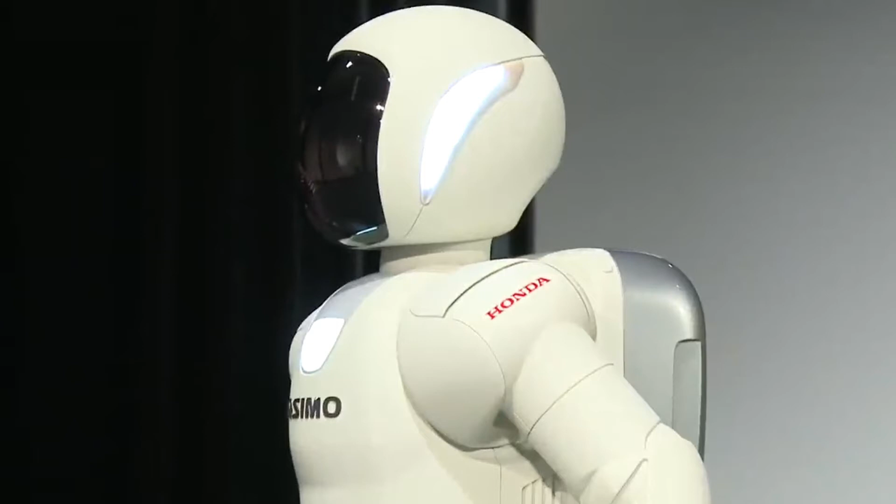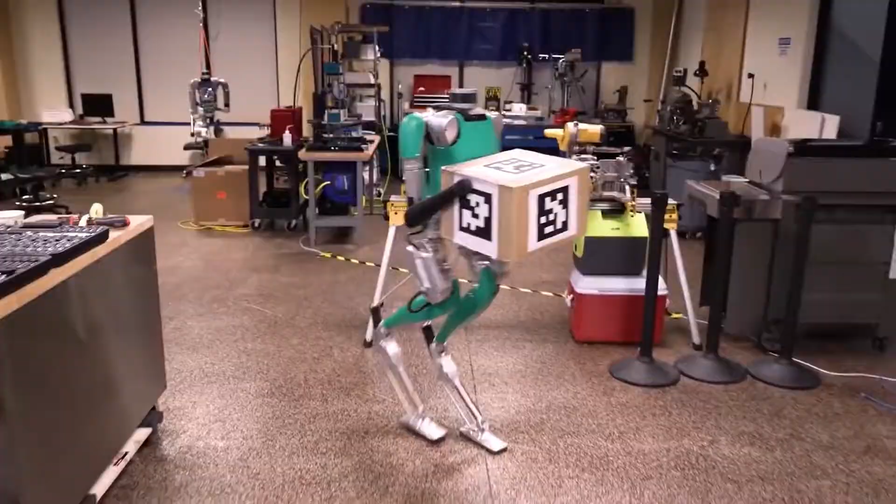Do you remember the first time you saw the Terminator movie, and seeing a future world where humanoid robots rise to the top on an intellectual level? It would seem that such advancements in the field of robotics has led us to a crossover point, with startup companies all around the world fighting to build the ultimate humanoid robots.

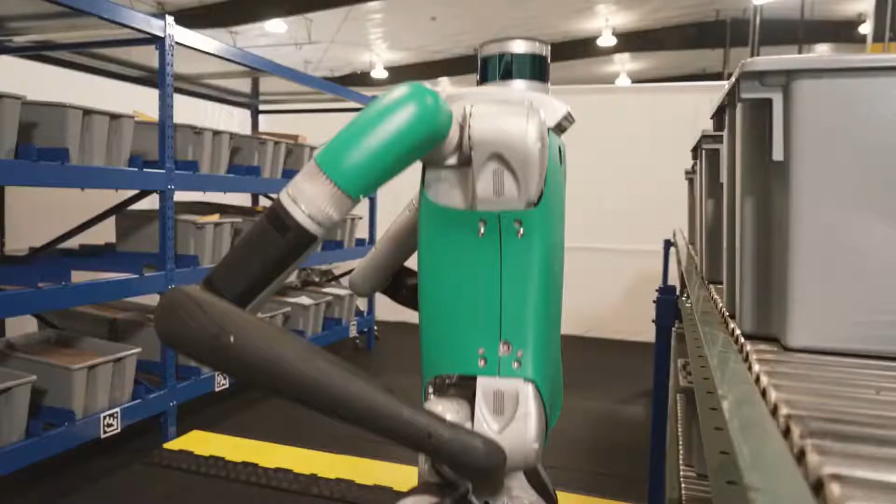So sit back and relax as we take a look at the 7 humanoid robots which are being integrated into our everyday lives.

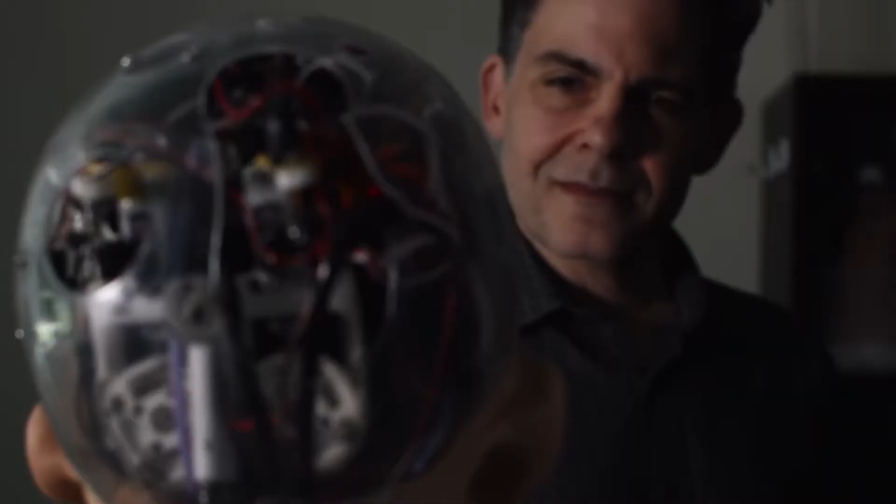Sophia was first activated on February 14, 2016. The robot is modeled after the ancient Egyptian Queen Nefertiti. As of 2018, Sophia's architecture includes scripting software, a chat system, and OpenCog, an AI system designed for general reasoning. Sophia imitates human gestures and facial expressions and is able to answer certain questions, to make simple conversations on predefined topics.

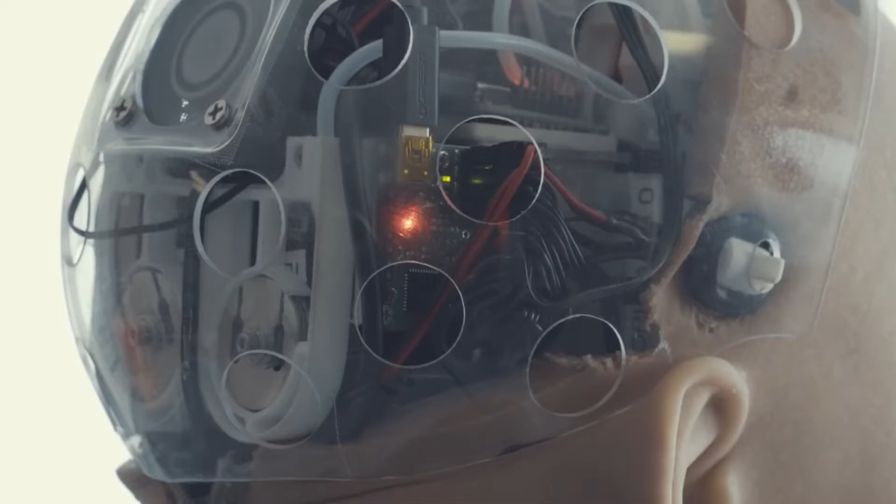Sophia uses speech recognition technology from Google's parent company Alphabet Incorporated. Her speech synthesis ability is provided by Cereproc's text-to-speech engine, which also allows her to sing. Sophia's software is designed by Hanson Robotics.

This is THR3 by Toyota. THR3 reflects Toyota's broad-based exploration of how advanced technologies can help meet people's unique mobility needs. THR3 represents an evolution from previous generation instrument-playing humanoid robots, which were created to test the precise positioning of joints and pre-programmed movements, to a platform with capabilities that can safely assist humans in a variety of settings.

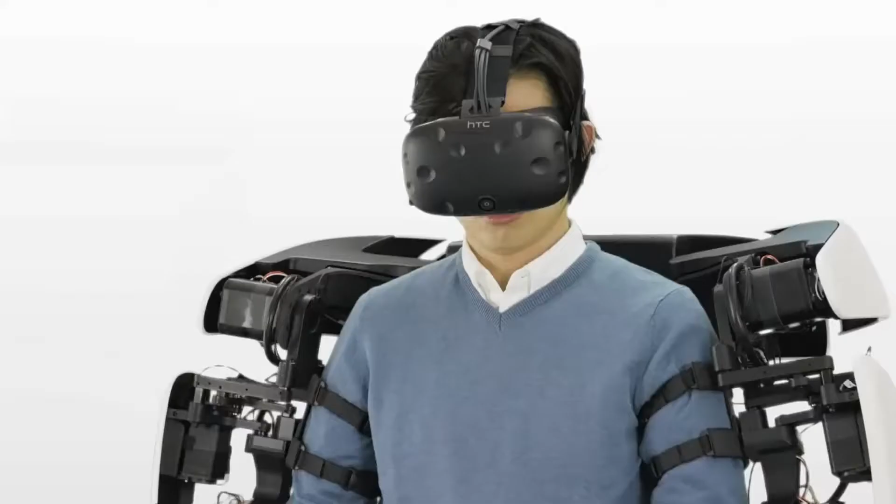Such settings include the home, medical facilities, construction sites, disaster-stricken areas, and even outer space. The partner robot team members are committed to using the technology in THR3 to develop friendly and helpful robots that coexist with humans and assist them in their daily lives.

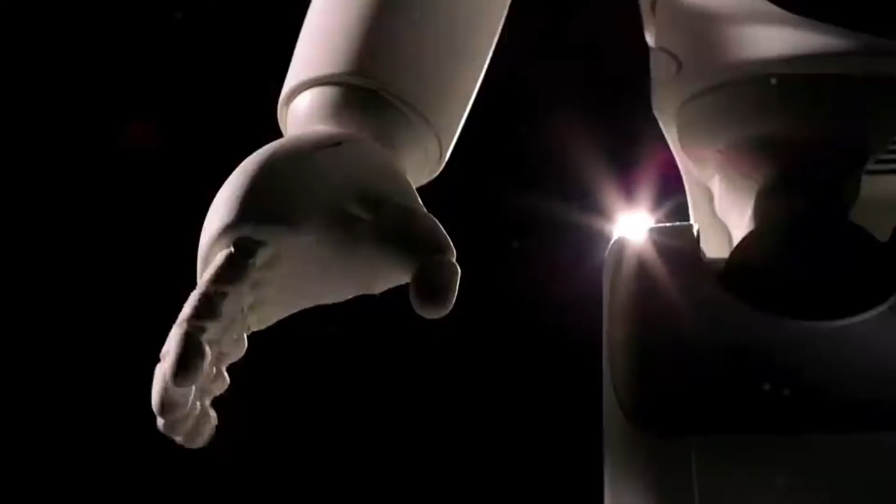People all around the world adore Asimo, the advanced humanoid robot designed to someday assist people in their daily lives. Asimo plays a valuable role globally in encouraging and inspiring young people who are interested in careers in STEM: science, technology, engineering, and math. Asimo, whose name is an acronym, was first dreamed up way back in 1986.

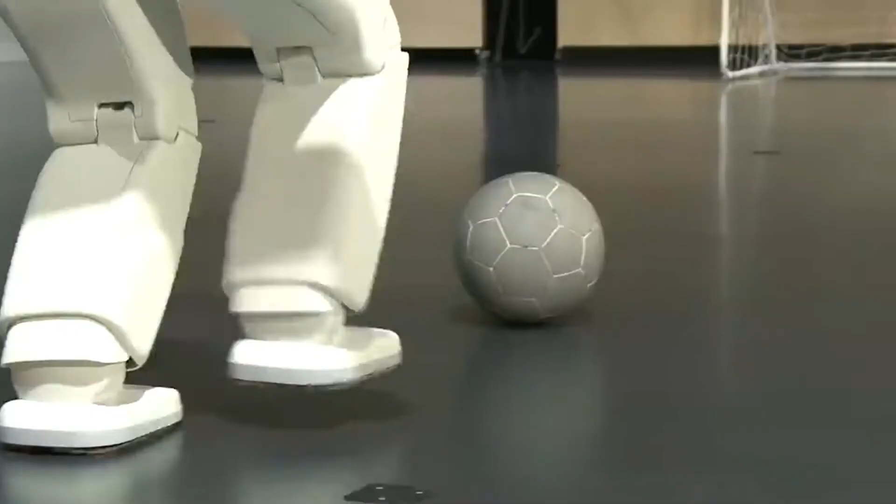Asimo made its US debut February 14, 2002, when it rang the opening bell at the New York Stock Exchange. Since then, Asimo has undergone many refinements as Honda continues to advance the robot's capabilities. Today, Asimo continues to travel the globe to amaze and delight people of all ages.

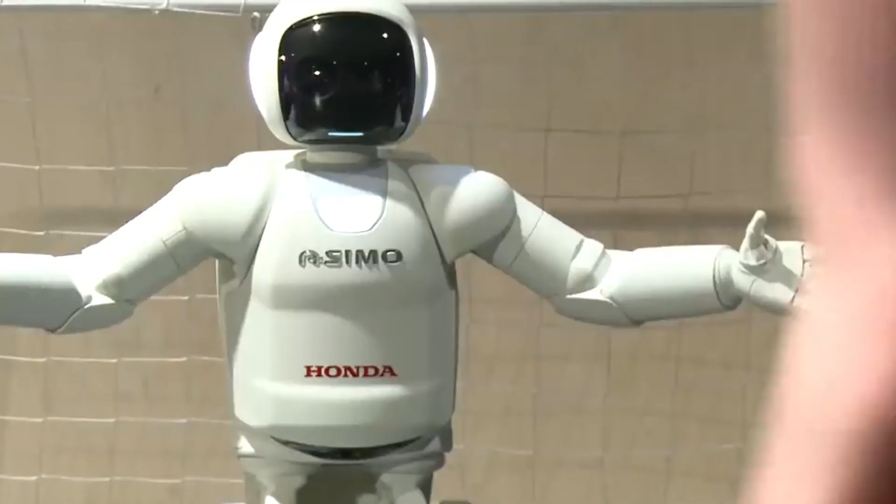And yet another one by Toyota. Do you see the trend? This is CUE3, the robotic basketball player.

For those unfamiliar, the CUE3 was first unveiled 2 years ago, where it sunk over 2,000 free throws in a row and 5 of 8 3-pointers. While it can't dribble or jump, the 6-foot 10-inch tall robot wowed spectators as it scored a free throw and a 3-pointer.

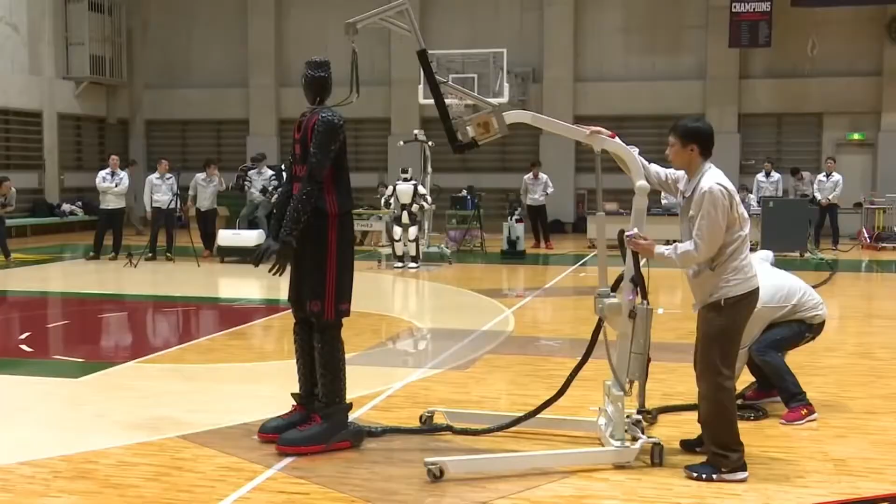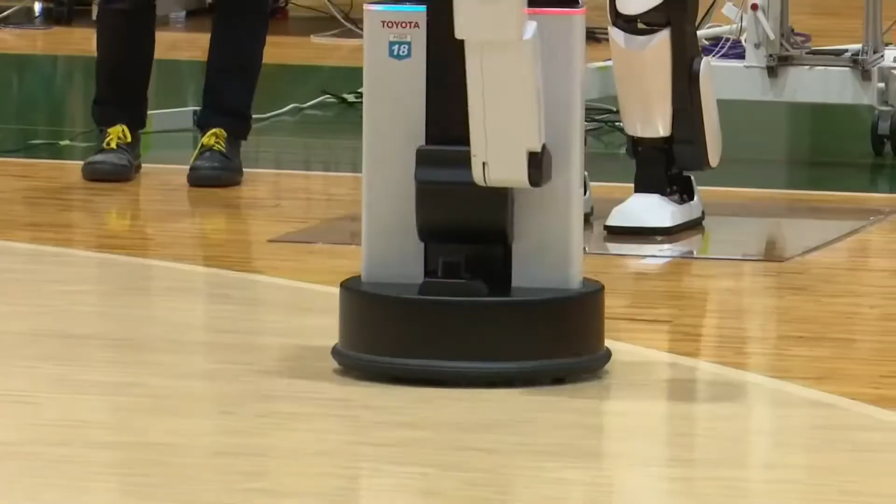CUE3 most likely won't be replacing NBA players anytime soon, but watching this strange-looking robot pick up a basketball from half-court, calculating the perfect arc, then scoring a half-court shot, is a sight to behold. CUE uses sensors in its torso to calculate the exact distance from the hoop to make those shots, using this information to determine the best angle.

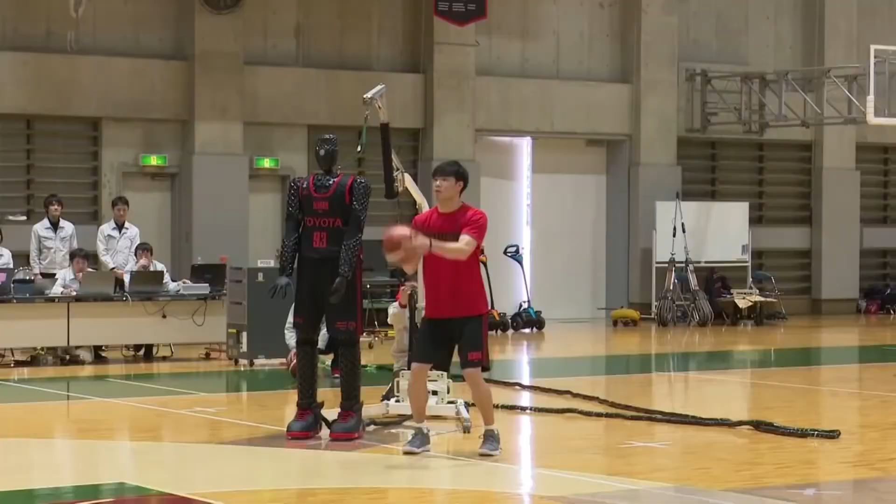This is GPR-1. It's a general-purpose robotic avatar, designed to help its human pilot accomplish a diverse range of tasks. Sanctuary's mission is to democratize work, with labor-as-a-service general-purpose robotic avatars, making it possible for anyone to do any job from anywhere and at any time they choose.

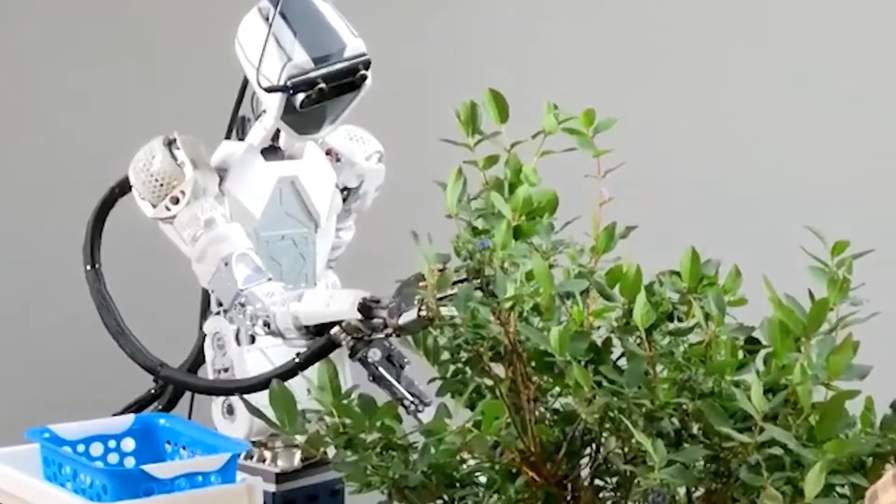We are making work safer, more accessible, and ultimately more productive. Using cutting-edge technology and artificial intelligence, cognition, and robotics, the startup company is delivering immediate customer value with labor as a service. From agriculture to energy, healthcare to logistics, retail to construction, and everything in between, on this planet or any other planet, the possibilities are literally out of this world.

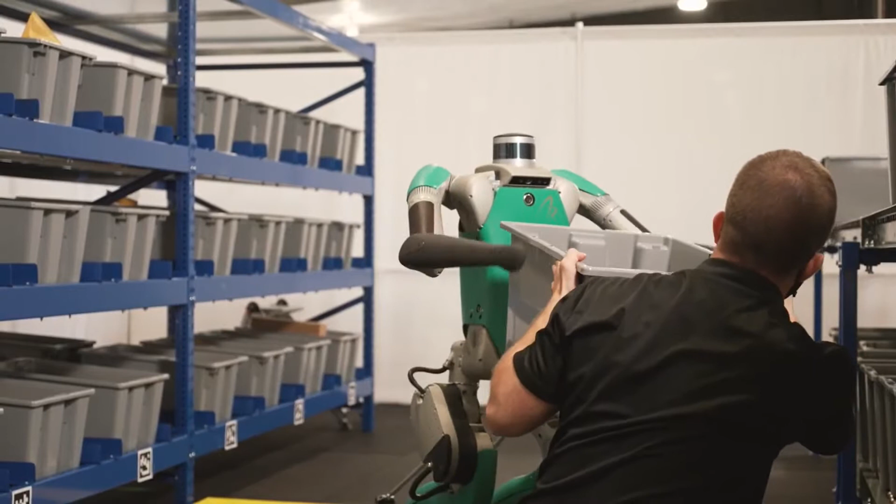During the pandemic, many businesses were forced to stretch their existing workforces to breaking point in order to meet demands, which is where Agility Robotics come in.

With Digit, our latest product addresses the mobility limitations of traditional robots, so that machines can work in environments designed for humans. Digit features robust walking and running gaits, perception to enable stair climbing, autonomous navigation in unstructured environments, and arms for basic manipulation tasks.

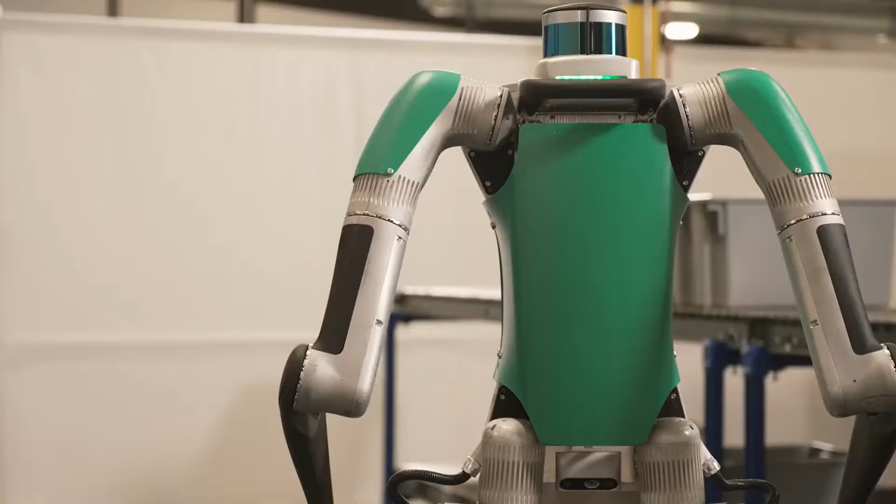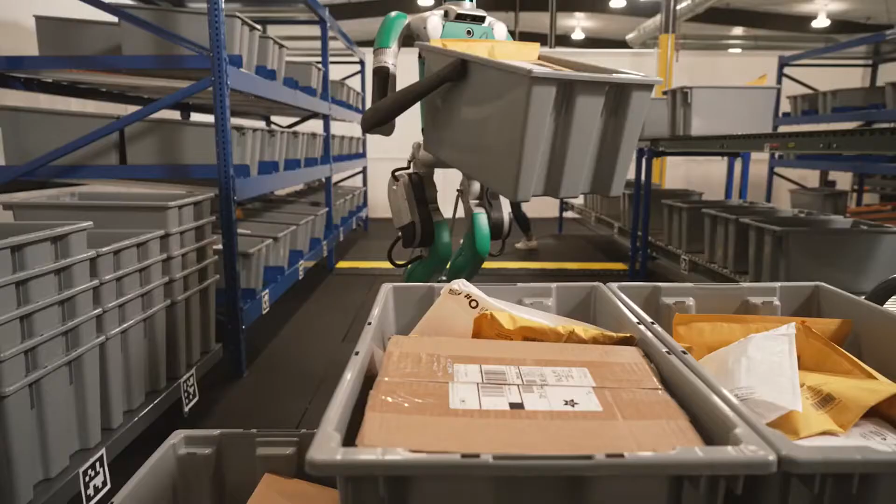Major features include an upper torso with integrated sensing, computing, and 2 forward-facing arms, an extra bay for additional computing and custom payload integration, sealed joints for all-weather outdoor operations, a UN 38.3 certified battery for cargo air shipments, a comprehensive software API that leverages our controls, perception and autonomy algorithms to develop end-user applications, and a low-level API for customers wanting to develop their own controller. These are just a few of Digit's groundbreaking capabilities.

Digit has been commercially available and shipping to customers since July 2020. On September 1st, Albany, Oregon-based Agility announced that it had raised a total of $28 million in funding thus far. A website for Digit claims that the product was designed to address the mobility limitations of traditional robots.

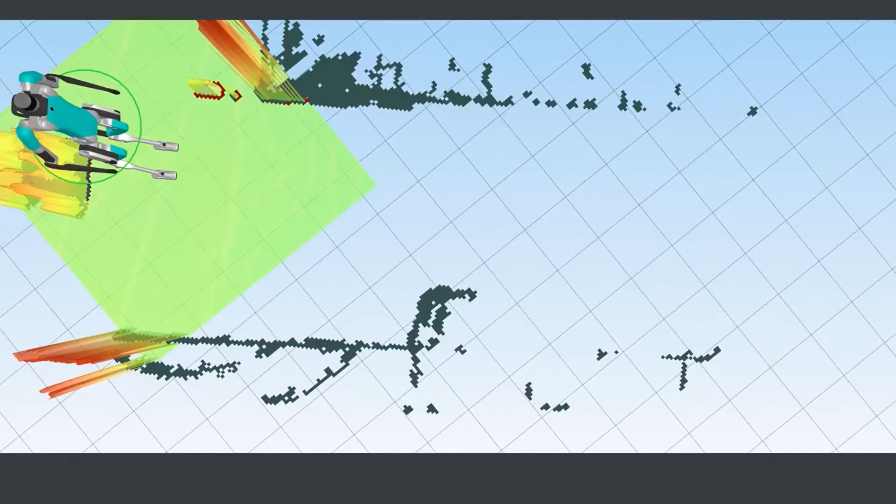So that machines can work in environments designed for humans. In this video, Digit can be seen using autonomous navigation in a warehouse-type environment, using its tiny dinosaur arms to grab boxes and then trot them across the room.

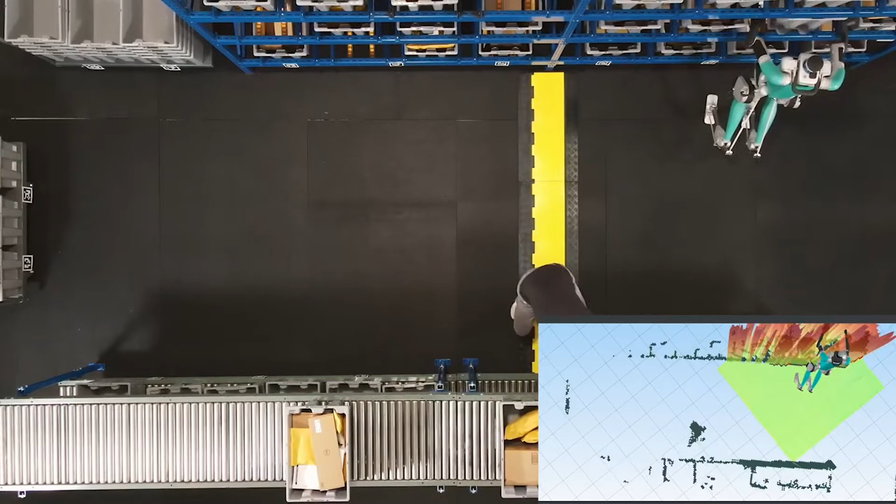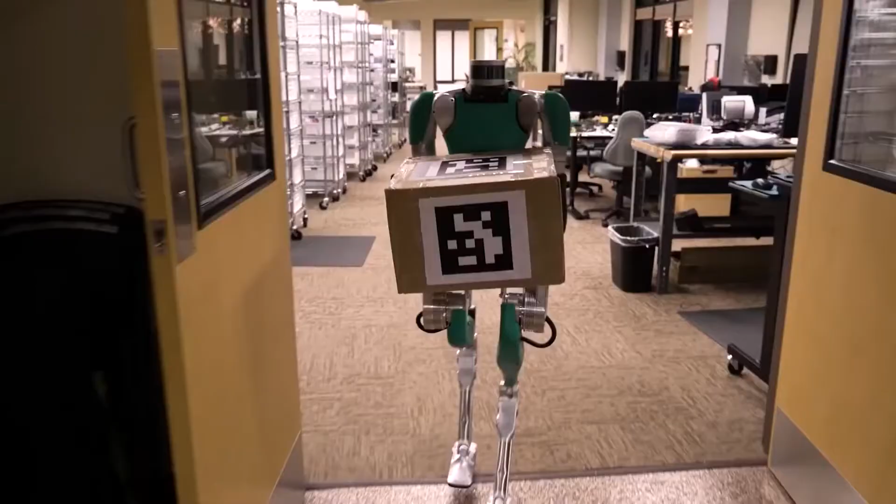Damion Shelton, CEO of Agility Robotics, said the brand's technology was designed to fill in the gaps of a human workforce, not replace it. A $20 million investment round, led by DCVC and Playground Global among others, helped build a really excellent consortium of investors. That's going to let us really get our Digit robots into customers' hands, doing useful work in the world.

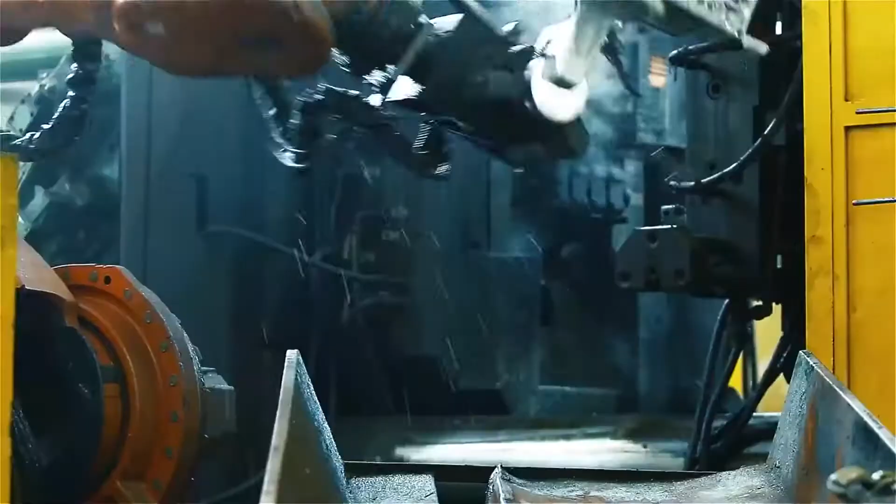Industrial robots are designed to do one task over and over, and to do it well, you design the whole process around the robot and the whole environment around the robot. But there's always going to be spaces and jobs that are designed around humans, designed around us, because this is our world.

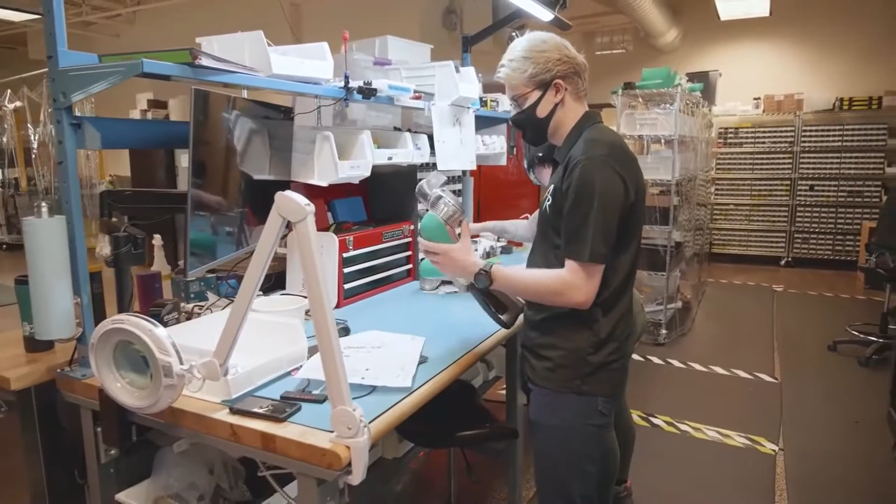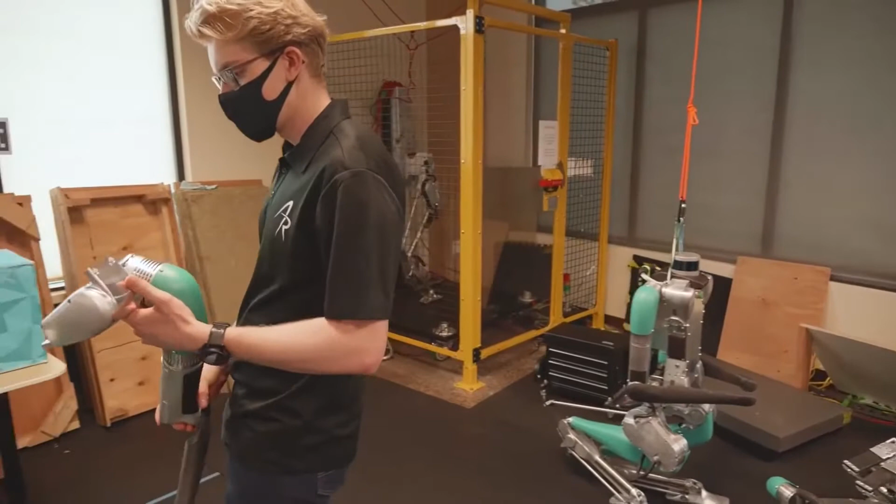If robots are going to be effective and useful to us, they're going to have to work on our terms, in our space. Having Digit work in human spaces means Digit is going to be able to do a wide variety of different tasks, things like package handling in warehouses, or indoor and outdoor delivery.

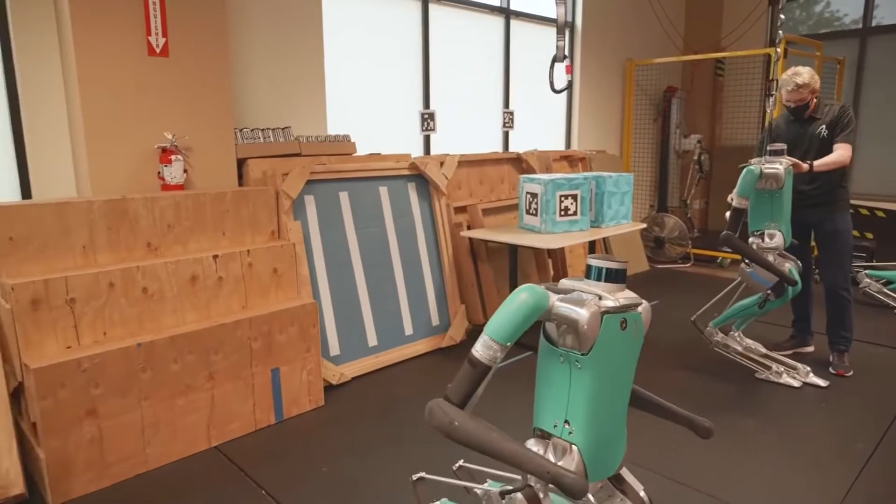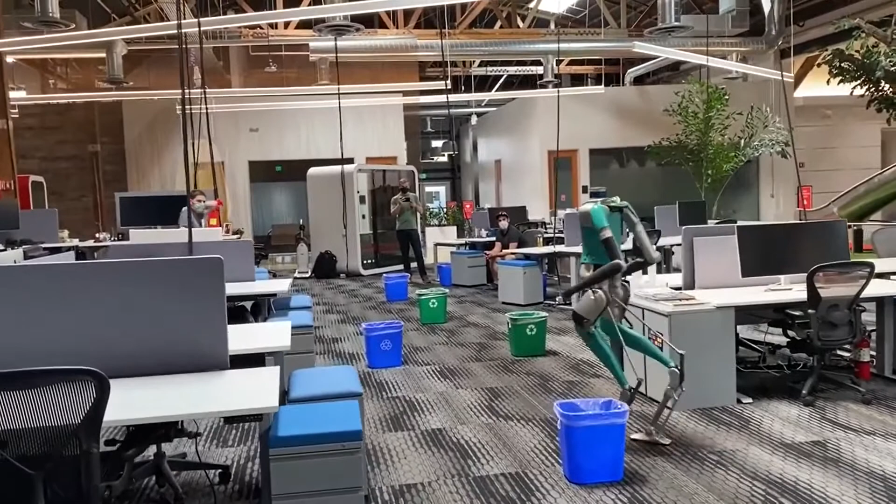The suggestion to replace employees doesn't make sense. What makes sense is leveraging technology to supplement, or augment, a human workforce, Shelton said. Doing so does two things: it helps companies meet customer demand, and it frees the human workforce into jobs that require decision-making, creativity, and collaboration.

The company sees Digit's value as a more plug-and-play solution than something like Berkshire Grey's offerings, which builds a fully automated warehouse from the ground up.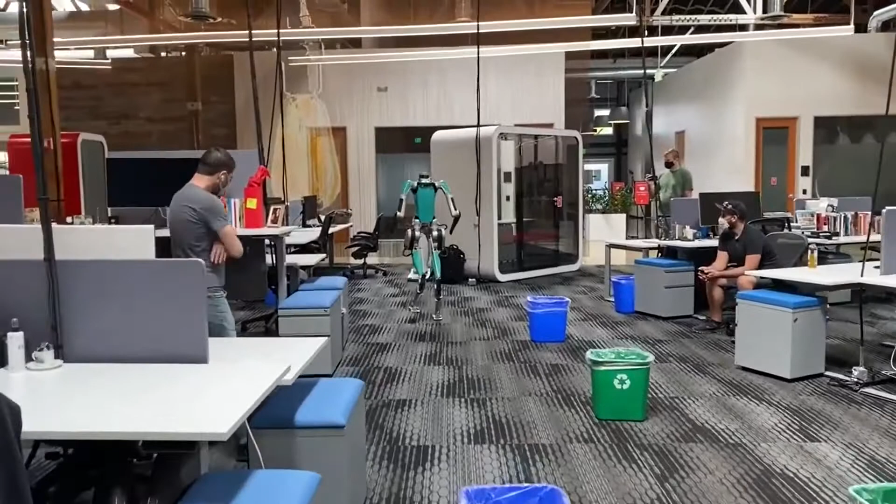There's still programming involved, of course. An Agility rep will appear on site to pre-map a location and help the robot execute its repetitive tasks.

Agility hasn't announced partners beyond Ford, though it says it's currently working with major logistics companies. It hasn't revealed numbers of Digits sold either, though it tells TechCrunch that the number is substantially more than the dozen Cassie units it sold prior to Digit, largely for research purposes.

We've grown pretty rapidly since last December, says Shelton. We're expanding our Pittsburgh office by the end of the year, in addition to the Oregon office. We have a pretty rapid growth rate, as we've been increasing the production rate on the robots.

So guys, don't be surprised when you see Digit turn up at your work. The change is coming. The future is now.

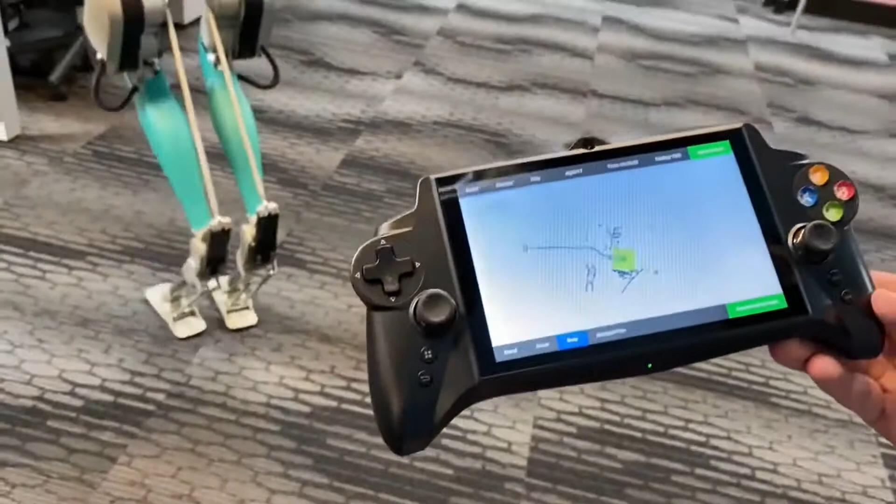And in today's one, we take a look at the fascinating science behind Atlas from Boston Dynamics. Atlas is the most dynamic humanoid robot currently on the market. Its state-of-the-art hardware gives the robot the power and balance to demonstrate human-level agility.

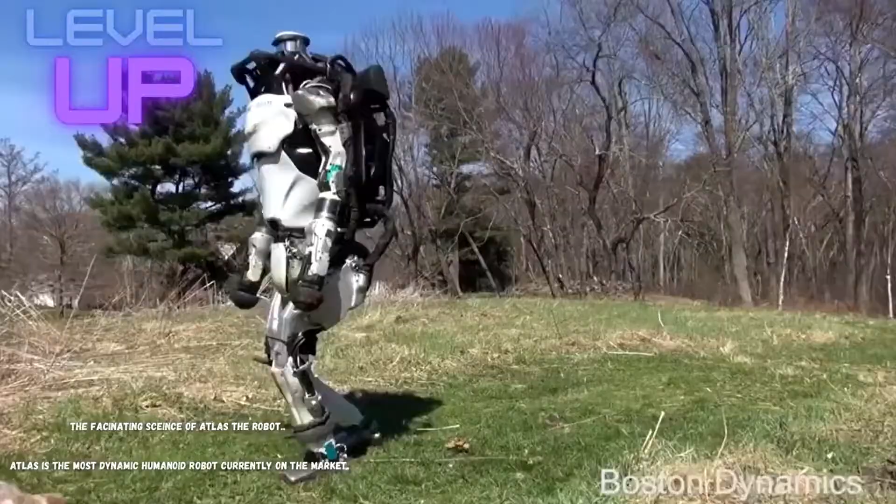The robot has one of the world's most compact mobile hydraulic systems. The custom battery, valves, and a compact hydraulic power unit enable Atlas to deliver high power to any of its 28 hydraulic joints for impressive feats of mobility.

Atlas's advanced control system enables highly diverse and agile locomotion, while algorithms reason through complex dynamic interactions involving the whole body and environment to plan movements. The robot uses 3D printed parts to give it the strength-to-weight ratio necessary for leaps and somersaults.

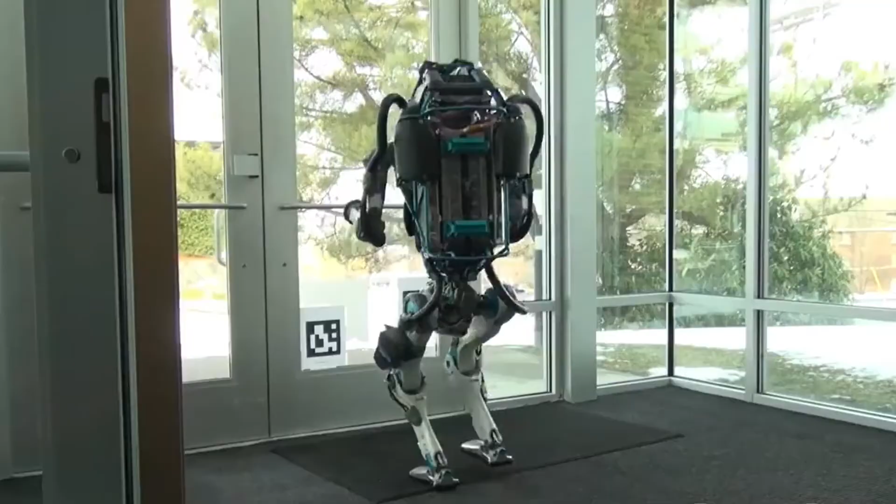By training Atlas to maneuver its way through complex parkour courses, Boston Dynamics engineers develop new movements inspired by human behaviors and push the humanoid robot to its limits.

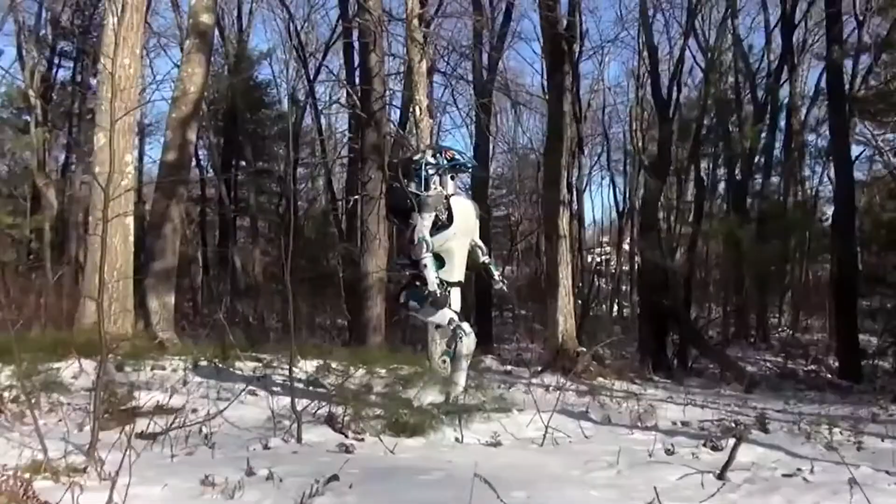Let's take a look at how Boston Dynamics are building a foundation with Atlas. A robot's ability to complete a backflip may never prove useful in a commercial setting, but it doesn't take a great deal of imagination or sector-specific knowledge to see why it would be helpful for Atlas to be able to perform the same range of movements.

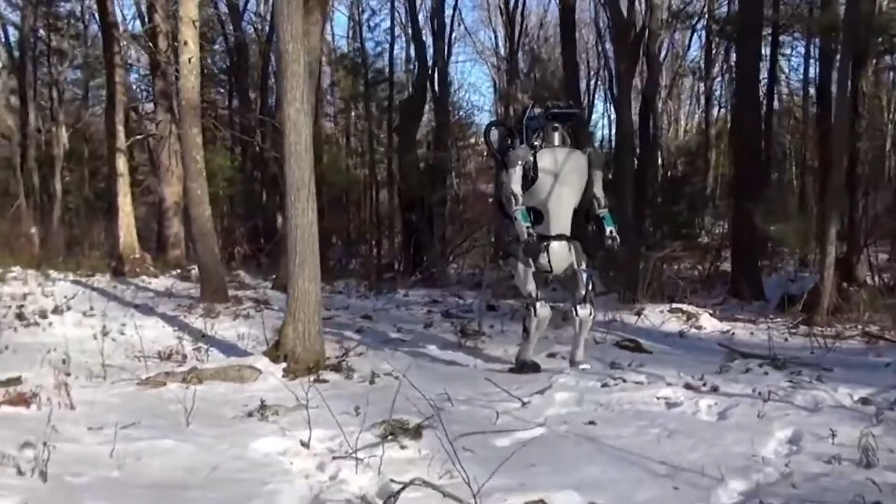If robots can eventually respond to their environments with the same level of dexterity as the average adult human, the range of potential applications will be practically limitless. Humanoids are interesting from a couple perspectives, Kuindersma says. First, they capture our vision of a go-anywhere, do-anything robot of the future.

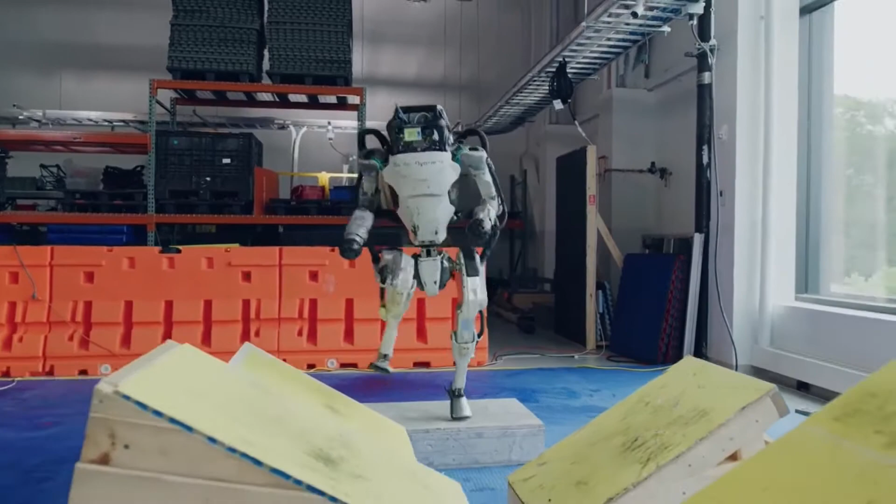Their combination of size and complexity creates hardware design trade-offs related to strength-to-weight ratio, runtime, range of motion, and physical robustness. At the same time, our control team has to create algorithms that can reason about the physical complexity of these machines to create a broad set of high energy and coordinated behavior. Ultimately, pushing the limits on a humanoid robot like Atlas drives hardware and software innovation that translates to all of our robots at Boston Dynamics.

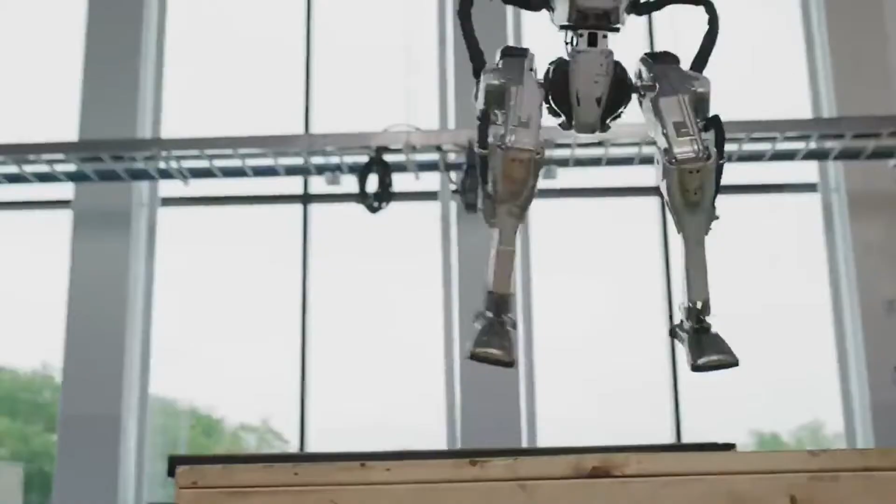Parkour, as narrow and specific as it may seem, gives the Atlas team a perfect sandbox to experiment with new behaviors. It's a whole body activity that requires Atlas to maintain its balance in different situations. It's really about creating behaviors at the limits of the robot's capabilities, and getting them all to work together in a flexible control system, Kuindersma says. There are many important problems that parkour doesn't force you to address, but that's not the point. We're not trying to solve everything all at once. The work we're doing now is allowing us to create a solid foundation.

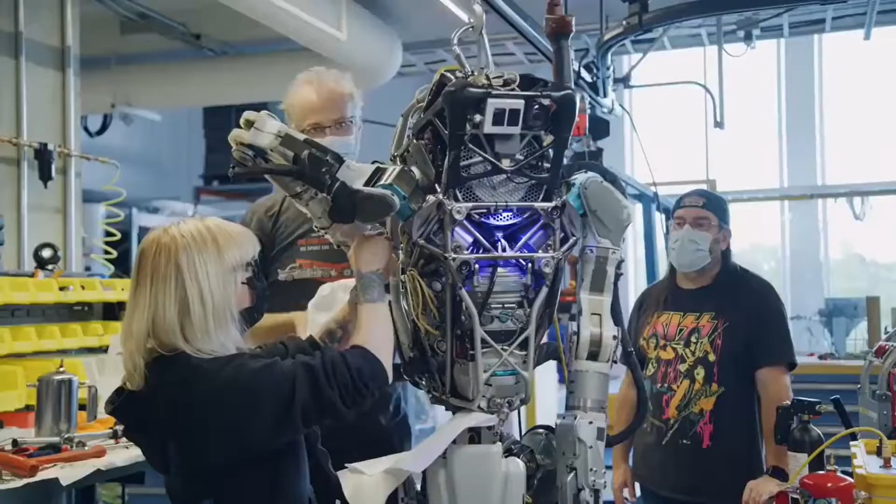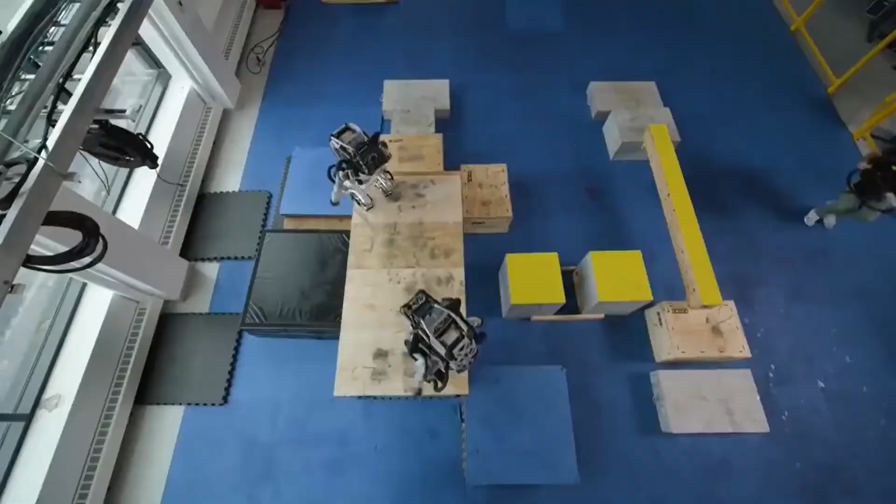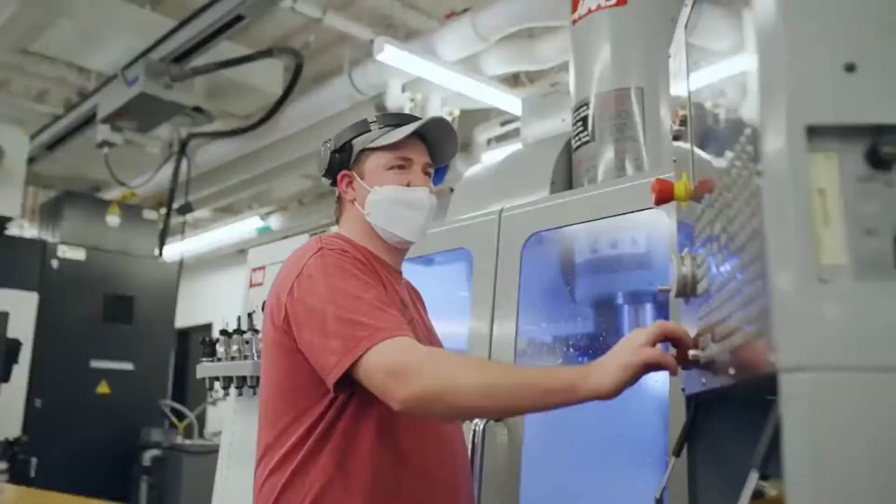Looking back over 8 years of Atlas videos, it's easy to lose sight of just how much progress the team has made during that time. In fact, some of the improvements are invisible to the average viewer, even though they represent giant leaps in technology. Atlas's moves are driven by perception now, and they weren't back then, Kuindersma explains. For example, the previous floor routine and dance videos were about capturing our ability to create a variety of dynamic moves and chain them together into a routine that we could run over and over again. In that case, the robot's control system still has to make lots of critical adjustments on the fly to maintain balance and posture goals.

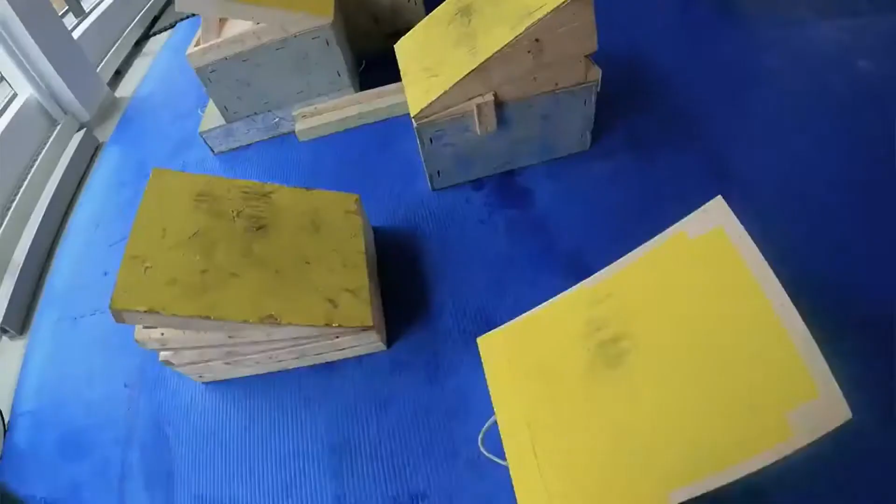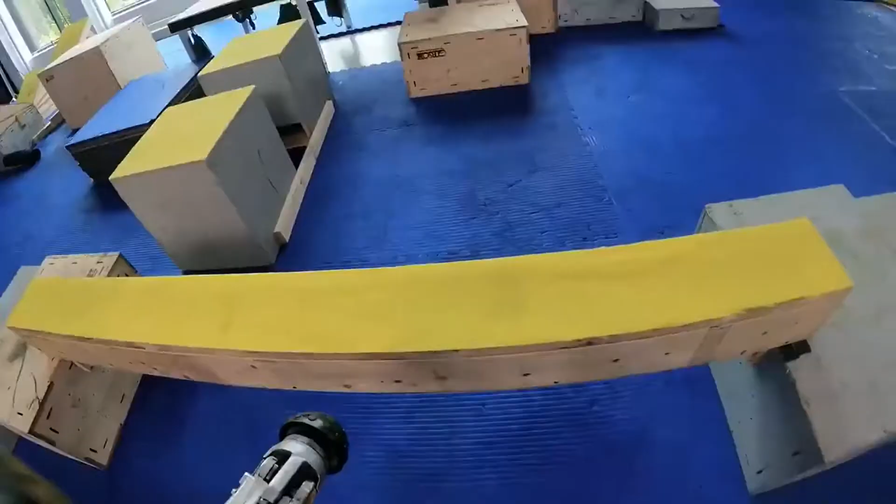In this iteration of parkour, the robot is adapting behaviors in its repertoire based on what it sees. This means the engineers don't need to pre-program jumping motions for all possible platforms and gaps the robot might encounter. Instead, the team creates a smaller number of template behaviors that can be matched to the environment and executed online.

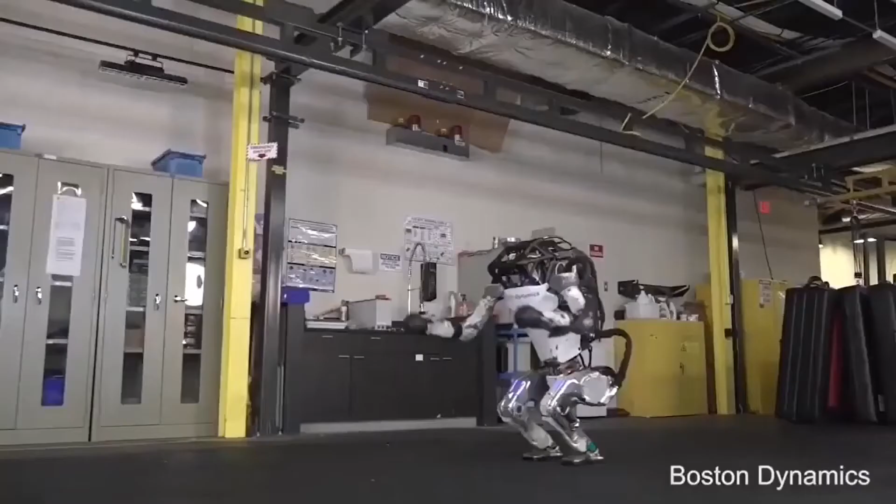Simulation is an essential development tool for the Atlas controls team, both for evaluating new behaviors prior to robot testing and for ensuring that new software changes don't negatively impact existing capabilities. But there's still no replacement for hardware testing, particularly in performance-limiting motions like vaulting.

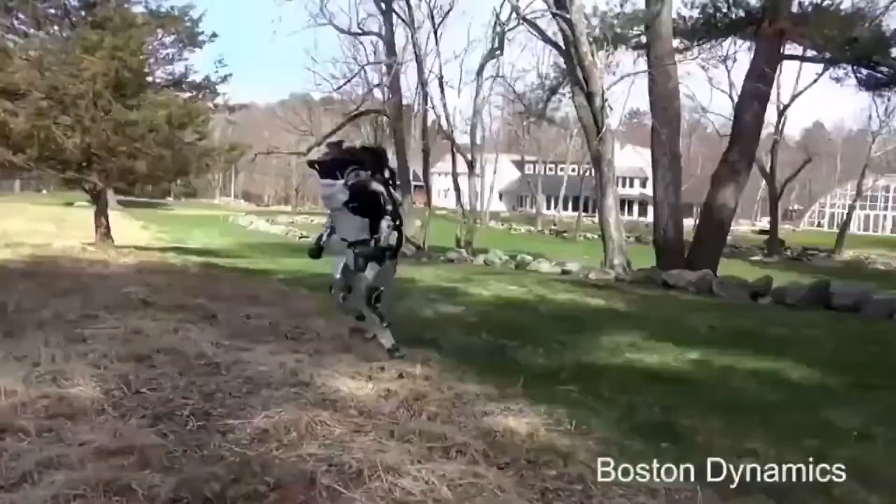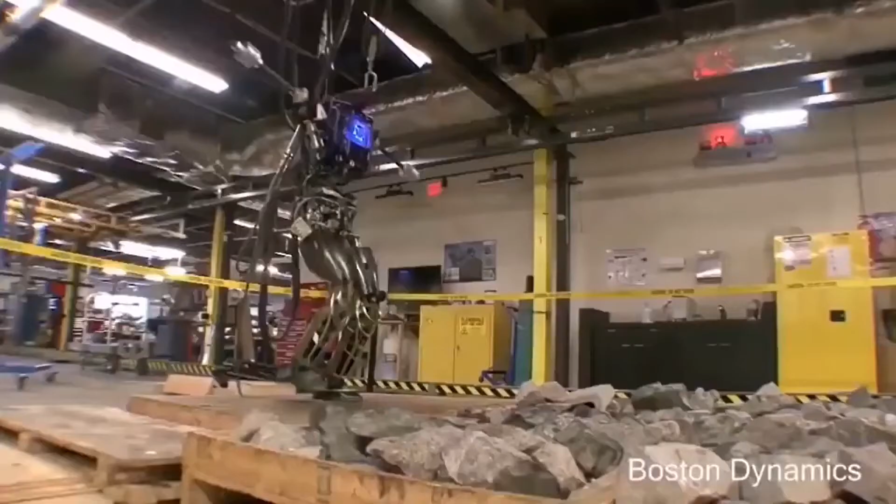About that vault. Unlike high-flipping gymnastics vaults, a parkour vault is a slightly less flashy method, designed to get a runner over a low wall or obstacle. In this case, the balance beam, only a few feet high. Atlas places its arm on the beam and then hoists its body over the structure. For many humans, this sort of vault would be relatively easy. But for the Atlas team, it represented a formidable new challenge.

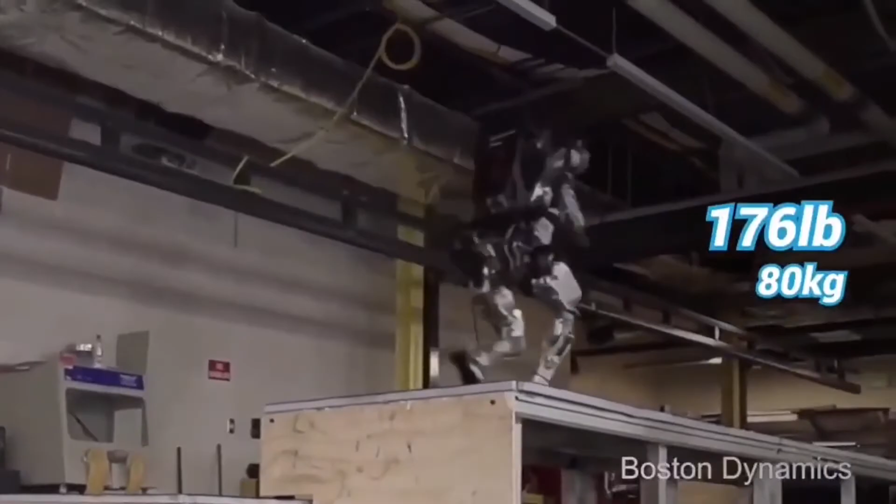If you or I were to vault over a barrier, we would take advantage of certain properties of our bodies that would not translate to the robot, Kuindersma notes. For example, the robot has no spine or shoulder blades, so it doesn't have the same range of motion that you or I do.